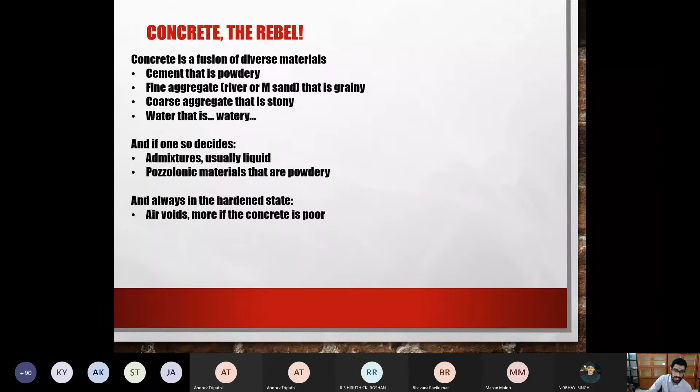Okay, so these are the components, and whenever your concrete hardens, you have some air voids, and if the air voids are too much, you have a poor quality of concrete. So you have everything. You have solids, liquids, and if you have air voids, you also have gases.

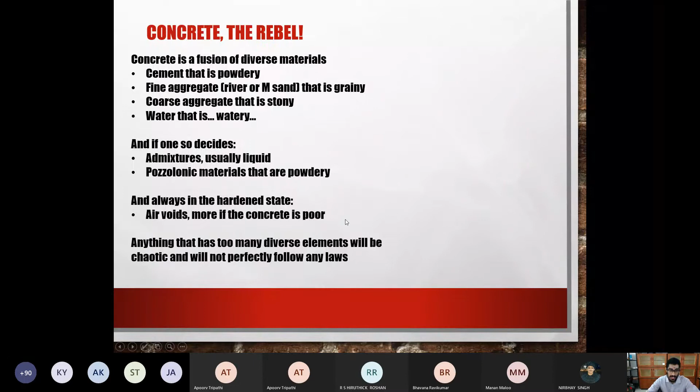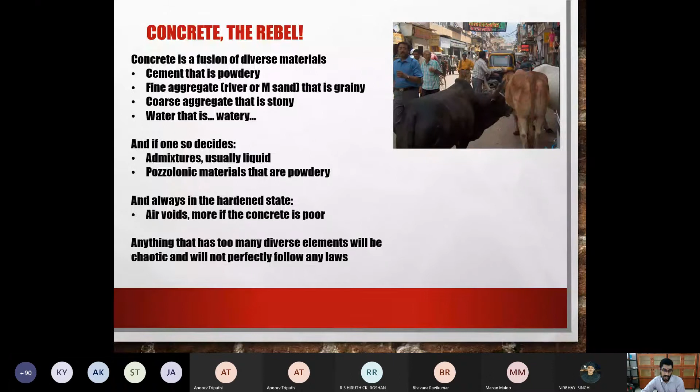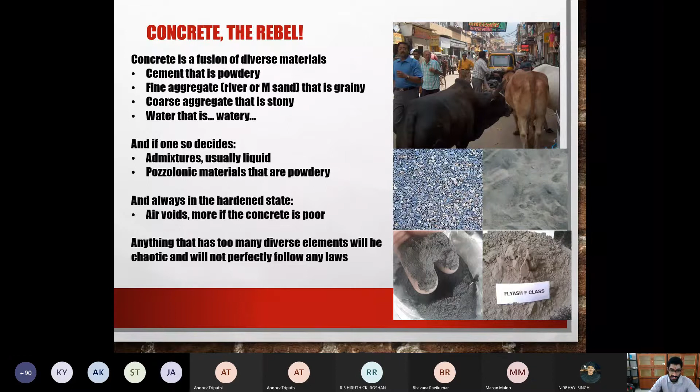Okay, anything that has too much diversity will be chaotic and will not follow any laws, just like our country. Okay, so whenever you have chaos, whenever you have too many diverse elements, you cannot expect any order. And similarly with concrete, it's not as predictable as some other metal, say like steel or aluminum or any metallic structural material. Concrete will not be as obedient as those materials.

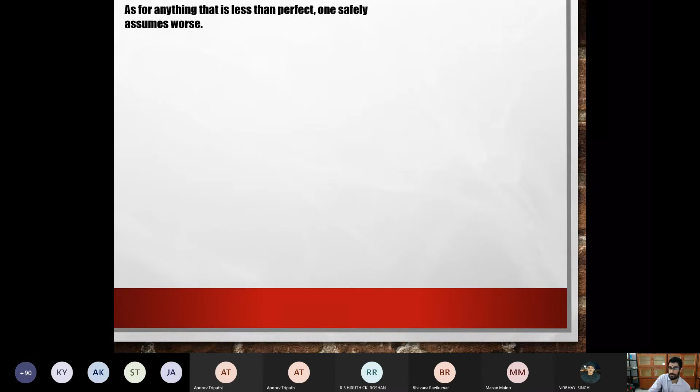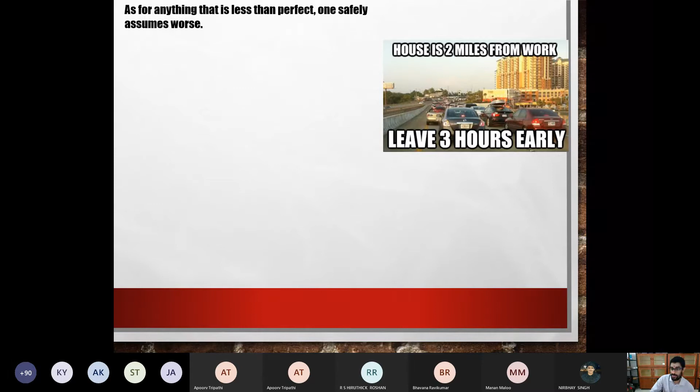Okay, so one thing is that whenever there is something which is less predictable, the thing that one person will do is they will assume what the worst case could be. So for example, if you have unpredictable traffic, you try to leave early. Depending on what your preference is, if you prefer being at home, you try to leave early from work. If you prefer being at work, you try to leave early from home.

And how early do you leave? It depends on the level of uncertainty in it. And this uncertainty can usually be measured by something known as standard deviation. So what is standard deviation? Mathematically, how do you describe standard deviation? Simple statistics. How do you find standard deviation generally?

How the distribution is spread. It can be a measure of how the distribution is spread. You said what? Sir, a measure of how much the distribution is spread. Okay, on either side of the mean. Yes. So that is standard deviation.

And in general, for concrete, because it is composed of several materials, you may not exactly have the same. If you talk about concrete technology, which you have done: if you want to find compressive strength of concrete, how many cubes do you test? 3. You test 3 cubes, and depending on how much quality was controlled when making those cubes, you may have very close ranges, or you may have a little bit wider range of compressive strength within those 3 cubes.

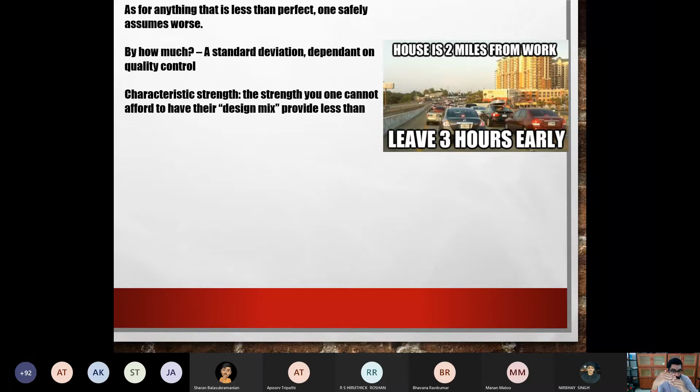It is not defined as the strength of concrete. It is defined as some strength below which the strength of concrete should not fall. So you're setting a limit and saying that the concrete strength should be above this limit. That is known as characteristic strength. For example, M25 means everything should come above 25, say 25.5, 26, 25.7. It will be something above 25. So that is known as characteristic strength.

If you take your code book, I will come to your code book soon. If you take your code book for concrete, it says the strength below which not more than 5% of the specimen results are expected to fall. That is known as characteristic strength. Okay.

So then you have something known as mean target strength. For example, you have done your mix design in your concrete technology, right? Yes, sir. Have you done it? Yes. So you know what mean target strength is, right? I don't need to explain more on this, right?

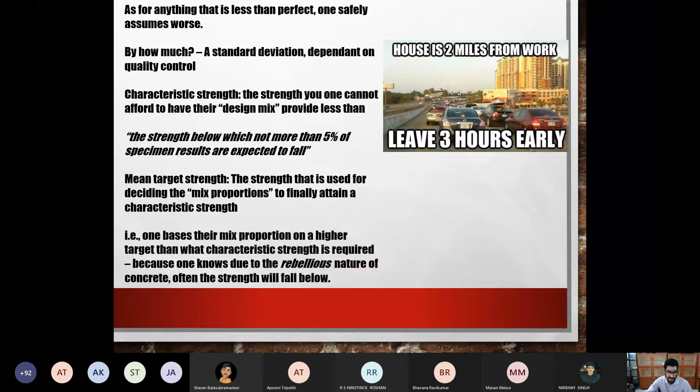Yes or no? I think you people would be familiar with this, because you've already done mix design in concrete technology. So I'm not explaining much further what is meant by mean target strength. So basically, the procedure is, if you want to get a certain strength of concrete, you will actually design your concrete for a greater strength. For example, one will make the mix proportion for a higher target than the characteristic strength you require. Why do you do it?

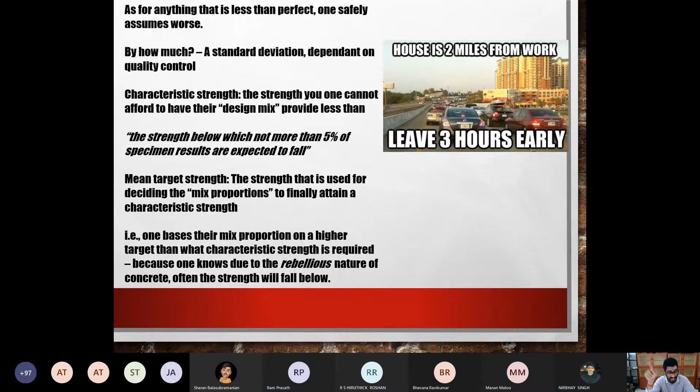Do you remember the formula for getting the design strength of concrete? Do you remember the formula for that? There is something. FCK plus 1.64 sigma. Sigma is your standard deviation, and depending on your strength of concrete, you have different values for it. So this is a graphical representation of your characteristic strength.

So if you test a lot of cubes, and you want your characteristic strength to be 30, you may have to design your mix for 30 plus 1.64 times standard deviation, which will come somewhere over here. And characteristic strength means that less than 5% fall below 30. So this figure tells what is mean target strength, what is characteristic strength, and how much can fall below it. This is just a simple representation.

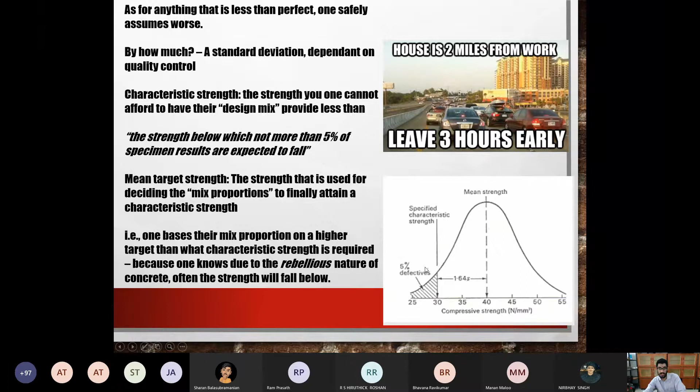Now the next thing is, in concrete technology, you have entirely dealt with the material aspects of it, just pure concrete, what pure concrete undergoes and how it behaves. When you talk about stress, anything given to you will take different types of stresses in different ways. So what are the different types of stresses that you know? Tensile, compressive, torsion, shear, and bending stresses, flexural stresses. So concrete will react to these stresses in different ways.

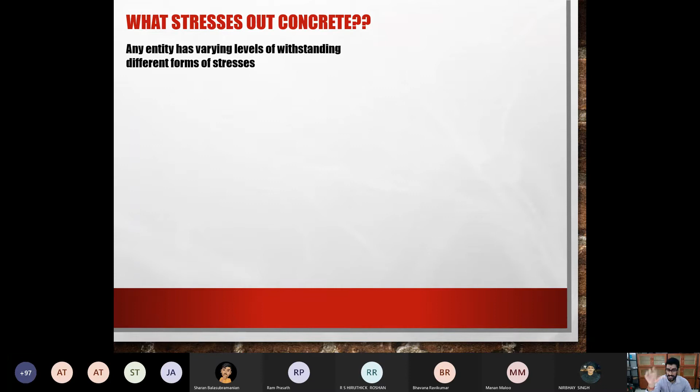For most items, like steel, it will behave the same way whether you test it in compression or in tension. Tension and compression are given a common name. Do you know what the name is? Axial stresses. So wherever you have axial stresses, metals will usually behave the same. When you come to concrete, even within axial stresses, the behavior in tension is different and in compression is different.

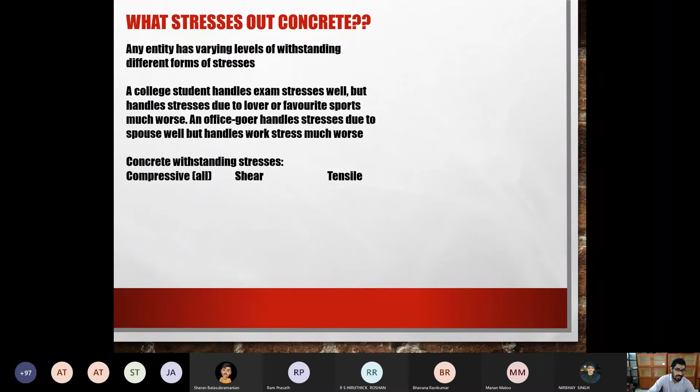Now this is just a colloquial example. A college student handles exam stresses well, but handles stresses due to his lover or his favorite sports team much worse. He will not care much about getting an E or a D, but if he has a breakup or if Barcelona loses, he will not sleep the entire night. And an office goer will be used to handling stresses from his spouse, but stresses at work will affect him more. So similarly, concrete handles different stresses differently.

For compressive stresses, it's good in resisting, and it's an excellent load-bearing material. For shear, not so good, because if you remember your mechanics of solids, whenever you have a pair of shear stresses, using your principal stress concept, you can always identify a principal tension direction and a principal compression direction. If you don't remember, please go back and recollect how shear stresses can be transformed to a principal compression and a principal tension direction.

So shear can be rethought in the form of a tension and compression pair. Because there's a tension part, it's not so good in shear. Pure tension, really bad. And bending stresses, you have read them in mechanics of solids, right? What are the two parts of bending stress? Based on the bending, one part of the beam will have compression and the other part will have tension. What is the location where it changes from compression to tension called? The neutral axis.

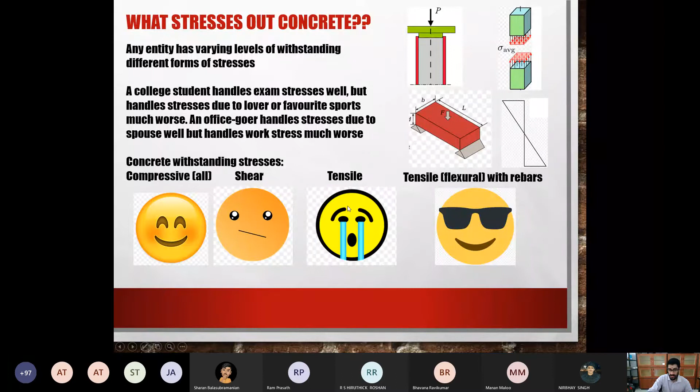So in general, if you have a beam like this, below the neutral axis will be tension and above will be compression. In a flexural member, above the neutral axis there's no issue, because it's compression and concrete is good in compression. Below the neutral axis, if you just leave it as concrete, it's going to be bad. If you give it rebars, then it will be able to handle the tensile stresses in beams as well.

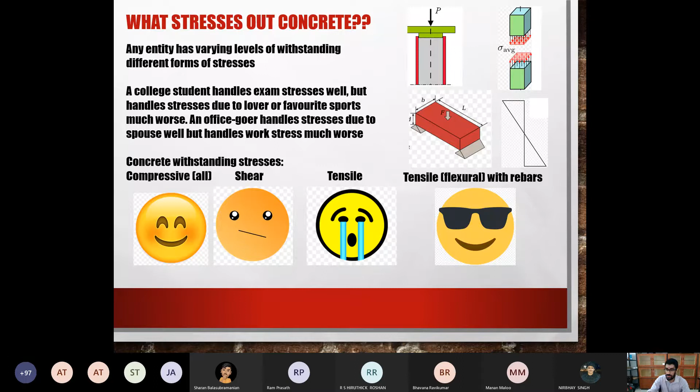So now this is basic RCC design. What do we mean by design? So this is the first thing. When you do design, you need to first identify the form and the purpose of the finally constructed structure. For example, if you are building a simple shed, just a shed, and you're building a column and you're giving the slab, for such a case you don't need to give a very thick or a big column. It's not going to take much load. It's just a covering roof.

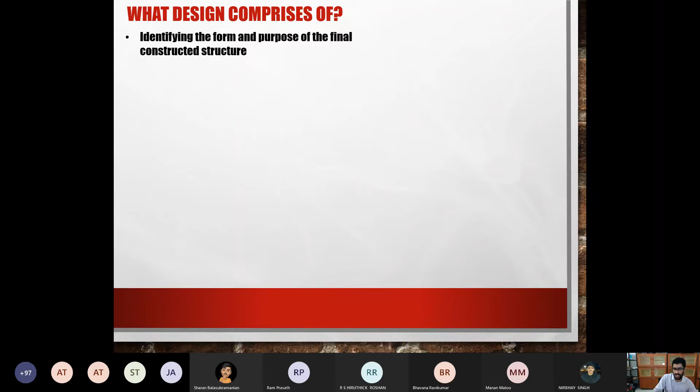Nothing is going to be coming on top of the roof except the weight of the roof itself. So for that you may even say that you don't want to use concrete. You may want to just give a wooden pole and keep a sheet over it. Depending on your money, depending on what purpose you're going to use it for, you have to decide what the form is going to be and what the use is going to be. Then after that, you will decide what material to use for it.

For example, if it's a truss, you may choose either steel or timber. If you are going to build the surface for a road bridge, there you will want to use concrete. You may not want to make a road deck out of wood or out of steel. If you make it steel, it will be strong, but it will vibrate a lot. Timber will not be strong enough. Concrete will ensure that neither of that is a problem. So first thing is identifying the structure and the form. The second thing is identify the material after you know what kind of a structure it's going to be.

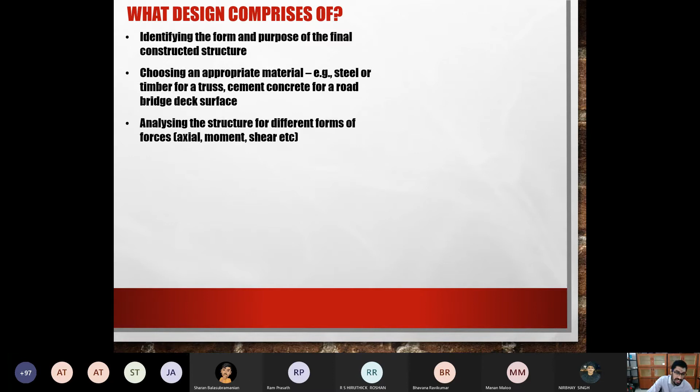And the next thing is you need to analyze. Once you decide the structure, you want to know what that structure experiences, what type of forces. Whether it's going to be subjected to axial forces, whether it's going to be subjected to moments, whether it's going to be subjected to large levels of shear or low levels of shear. You need to identify what is going to be faced by that structure. And then you need to know how that material behaves in each of these types of forces.

So we just saw in the previous slide concrete. Once you make it RCC, it's going to resist moments pretty well. As far as axial forces are concerned, it's pretty good in compression, pretty bad in tension. So depending on the types of forces, you may also try to know how to actually use that material to take that force. And to do this, you need to have a very good sound knowledge of mechanics.

Because if you want to know axial forces, for example, if you are building a truss, you need to know the axial force in each of the members of the truss. For that, you need to know how to analyze. You need to know method of joints or method of sections. Even if you're using a computer, you need to know how to use that computer program based on mechanics. Similarly, if you're getting a bridge girder, it's going to be subjected to bending moments. You need to know how to evaluate that bending moment, how to evaluate that shear force. Only when you are able to evaluate those will you be able to decide how that material is going to behave under those forces.

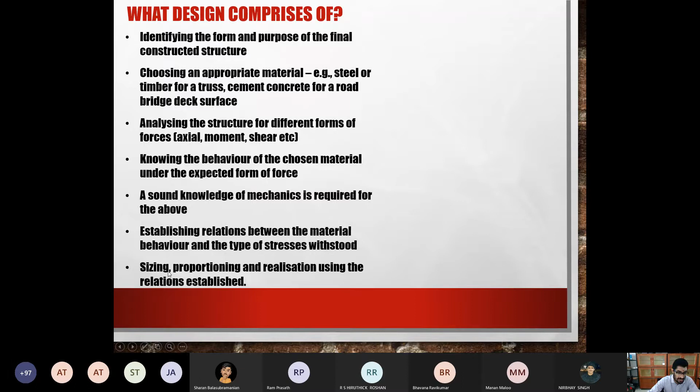And the final thing is you also need to know the relation between the material behavior and the types of stresses: how the material behaves and what types of stresses it can withstand. And the final step is, based on knowing the forces and how the material behaves for those forces, using the established principles you can decide what the sizes should be and what the proportions should be for the particular structural element.

So for example, you have a bridge, you have girders, you have a deck on top, and then you have girders running this way and girders running this way. Then these girders are standing on top of two piers or something like two columns.

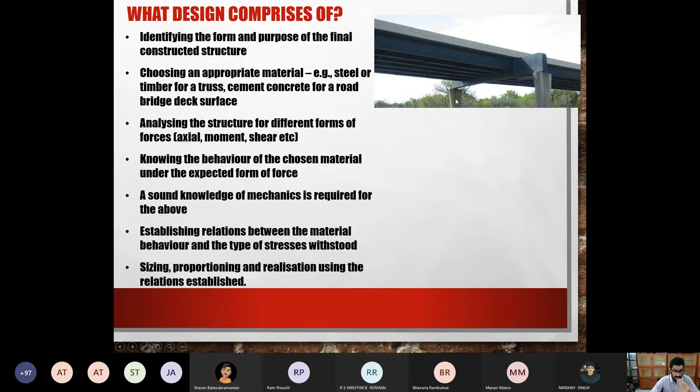Then from the girder to these piers, what are the bending moments in these piers? What are the axial forces in these piers? How to design them. Once you know this and the relations, you can decide whether you want to use an RCC beam or a steel beam. If it's a steel beam, you need to know how wide, how deep, how thick the flanges should be, etc. If it's an RCC beam, you decide the dimensions, the reinforcements, the hoop reinforcements, etc.

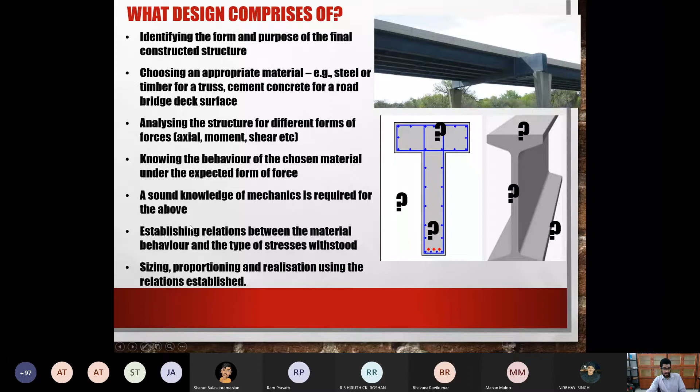Okay, so this is the process of design: identification, selection of material, analysis of the structure, behavior realization of the structure, establishing the relations, then deciding the sizes, proportions, and reinforcement, etc. So this is the process of design.

Now coming to concrete as a material under different states of stress. This is how concrete behaves under uniaxial compression, meaning your common compressive strength test. You know how to do a uniaxial compression test in concrete. If you want to find the compressive strength of concrete, what type of specimens would you use? What shape? Cubical or cylindrical.

So what sizes are they? If it's a cube, what size? If it's a cylinder, what size? 15 by 15 by 15, and 15 centimeters diameter and 30 centimeters height of cylinder. Yeah, either that or you can also use 10 dia and 20 centimeter height. Basically, the ratio of height to diameter should be 2. That's the main thing.

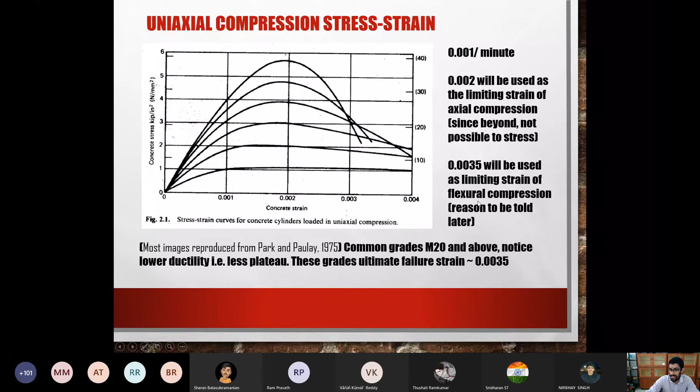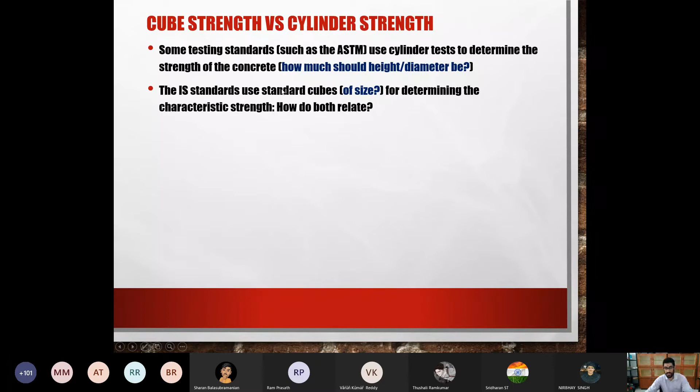Now, cube strength versus cylindrical strength. Some testing standards, like ASTM. What is ASTM? American Society for Testing and Materials, I suppose. It uses cylinder tests to determine the strength of concrete. You told me the height by diameter should be 2. The Indian standard uses standard cubes; the size is 15 cm cube for determining the characteristic strength. Of course, there should be a relation between both of them.

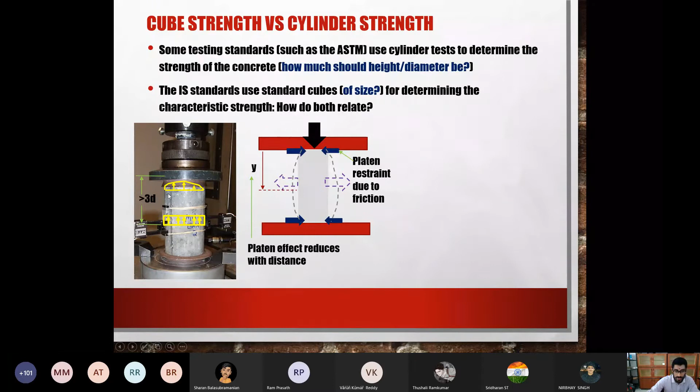One thing is, when you test a cylinder like this, this is height, this is diameter, the ratio is 2. The top surface of your cylinder is where the load is applied. If you look at the stresses at this top surface, you will find that at the circumference you will have very low stress. As you go near the center of the cylinder, you will have highest stress.

But if you go into the cylinder for a distance greater than 3 times the diameter... Of course, we are not going to reach 3 times diameter, only 2 times diameter in your cylinder size. Only if the distance between the loading point and the location is greater than 3 times the diameter will you have a uniform stress distribution. But our cylinders are of ratio 2, not 3. Therefore, even at the center of the cylinder, you will not have uniform stress distribution. It will be a little bit non-uniform. So that is one thing.

The other thing: when you press it, the cylinder will try to expand in its middle. However, at the top, you have the plate on top and the plate on bottom. At that location, because there's friction between the plate and the surface of the cylinder, it cannot expand that much, because the friction force will oppose this expansion. That is known as the platen effect.

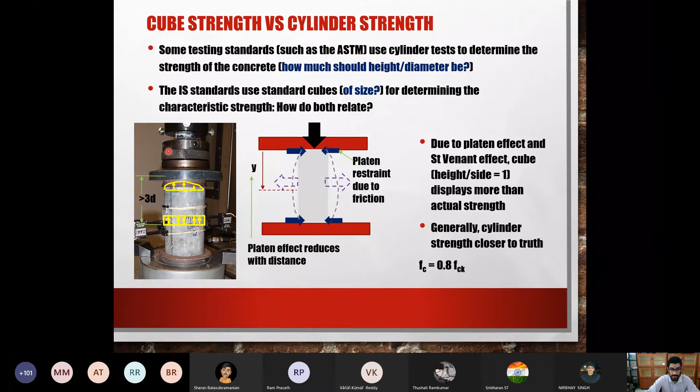I'll give you two situations. One is you are testing in the lab - you're probably doing this test in a lab. Another situation, you're building a big structure and you're keeping some strain sensors on it, measuring the strain for the whole year. So which curve will you get if you test in the lab? Which curve will you get if you test the building?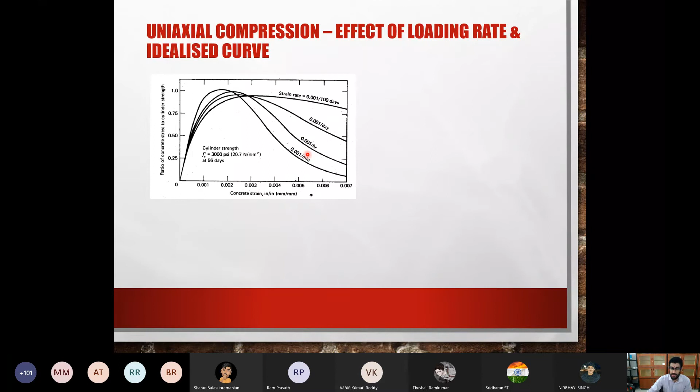You have some curves over here. Which strain curve corresponds to lab test? Which strain curve corresponds to actually putting sensors in a building and measuring it over time? The topmost curve for the building. And for the lab, the bottom one maybe - yeah, mostly the bottommost curve. Sometimes they'll use the second curve, but only for specific tests. Most common is the bottommost curve. So that's why I meant normal service condition means in actual application, like in a building.

So in a normal service condition, like in a building, it will correspond to low strain rates like this - you get the gradual yielding curve. After this 50% of strength, at least till this point, you can have almost a straight line. Beyond 50%, it starts to become a bit parabolic. So this portion of the curve should be idealized by a curve as described in the equation given by this. Until this point it can be taken as almost linear; beyond this part it becomes a bit parabolic. So you need an equation for that.

This is the commonly known equation for that, given as FC equals FC double dash. EC is the current point strain, epsilon C. Epsilon naught is that 0.002 you see over here. And this is FC double dash, which is the top peak strength of concrete, the ultimate strength of concrete. Based on that, we'll be able to model this parabola.

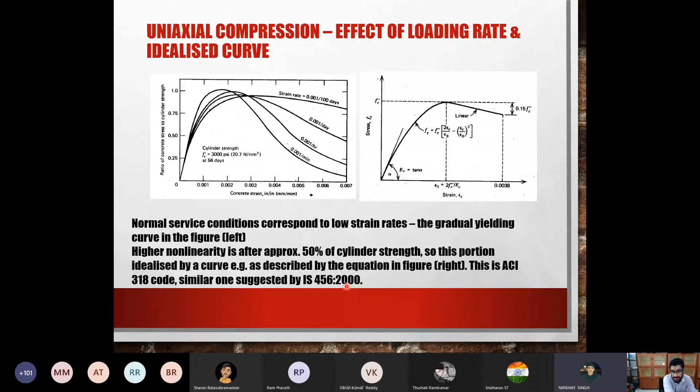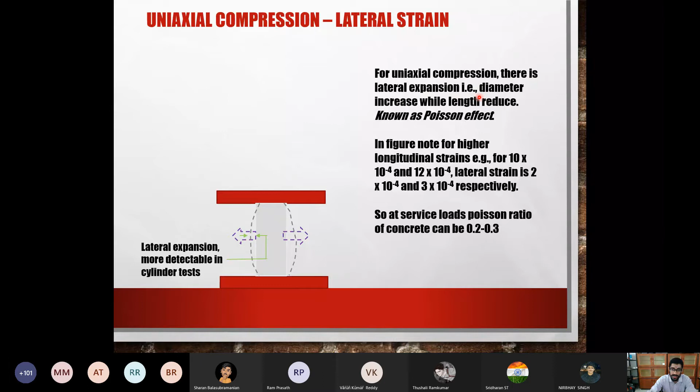One is direct axial strain. You also can have lateral strain, meaning when you have expansion this way, it becomes lateral strain. This is more detectable in cylinder tests where the diameter will expand a bit. For uniaxial compression, there is lateral expansion - for example in a cylinder, you will have an increase in diameter while you compress it. This is known as the Poisson effect.

So then you have this figure. Longitudinal means axial, along the length. Lateral or transverse both mean the same. So that is this strain curve. Note that for higher longitudinal strains, for example 10 into 10 power minus 4 and 12 into 10 power minus 4, lateral strain is about only 2 and 3. So that is the ratio of transverse strain to longitudinal strain.

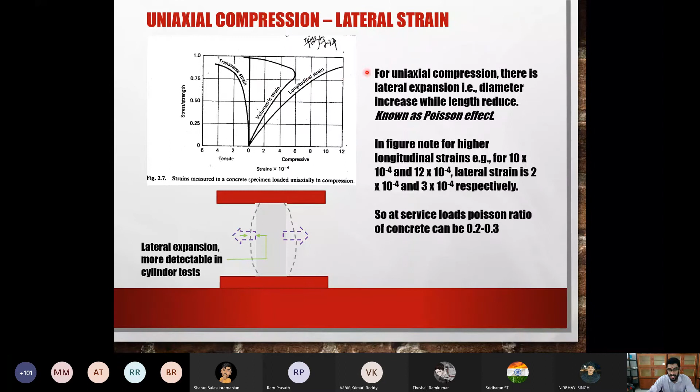So what is the other name for ratio of lateral strain by longitudinal strain? It's known as Poisson's ratio. So you can just take this ratio. You see that the Poisson ratio of concrete can be taken about 0.2 to 0.3. Simply know this: you take about 10 divided by 2 divided by 10, or 3 divided by 10, like that.

So these are the different tests and the different code books. For cylindrical strength you can use IS 516, similarly for cube strength as well. I hope you've heard of this code book in concrete technology, IS 516 — this is the code book which tells you how to do these tests. So you can just have a look at this code book, it's freely available on the internet. So your task for today is to go to the internet, search for IS 516 and go through what they say for these two tests. You've already learned this test, but just open the code book and see that there is a code book for these things.

If you want to find the modulus and Poisson's ratio, IS 516 does not specify a test — you may have to use the ASTM standard. For split cylinder strength, IS 5816 is used. Split cylinder strength test and the 3-point bending test, both given by IS 516 — these two tests are used to find the tensile strength of concrete.

Now why do you think we are not doing it the way we find compression strength — taking a cylinder and compressing it to find the compressive strength? Similarly, if you want to find the tensile strength of a steel rod, what test do you do, and what machine do you use? I'm not sure if you'd be aware since you've all done online lab, but anyway I'm still asking. So why don't we do the same thing for concrete to find the tensile strength? Can you do it?

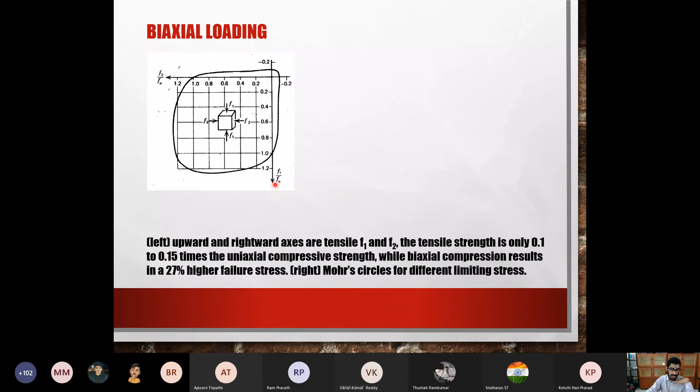This quadrant marks the envelope of stresses when both F1 and F2 are compressive. When both F1 and F2 are compressive, you see that your concrete can actually reach a strength greater than the uniaxial compressive strength. Fu is your uniaxial compressive strength—meaning this test you did, say for M25, you got 25 MPa as strength. If you actually do a biaxial compression like this, the strength you get will not be 25, it will be 25 times 1.2.

This seems a bit strange. So just loading in one direction gives some strength value. Now you're adding additional load in another direction, but the strength, instead of reducing, is increasing. Why?

Sir, the loading is contributing to the strength, sir. Actually, the concrete specimen will have a failure in one direction—like in the lateral direction, it will have a failure. If we restrain it from the lateral direction, then the strength will increase automatically.

It may get amplified, sir. Sir, when we are compressing the specimen in the uniaxial direction, the concrete specimen may get a failure in the lateral direction. So when we are restraining the concrete specimen in the lateral direction, in biaxial loading, we can increase the strength.

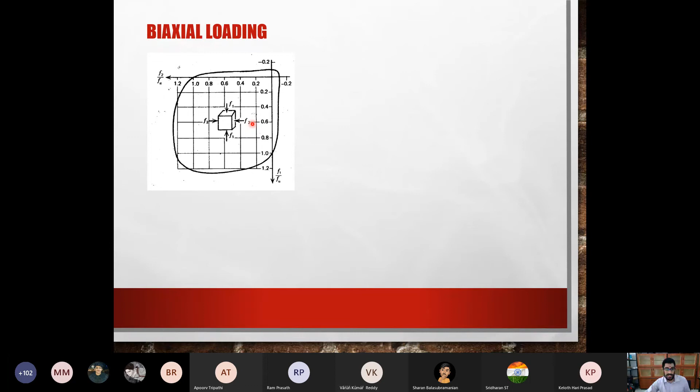However, if one of those directions is tensile, then it becomes really bad—you get less than 20% of the strength you get by a uniaxial test. For example, if F2 becomes tensile, the side is already expanding, and if you pull it further, it's going to fail much faster. That is what is happening.

So, what is this picture? You see some circles—what circles are they? Mohr circles? Mohr? What do Mohr circles tell you? Geometrical interpretation between the shear stress and normal stress.

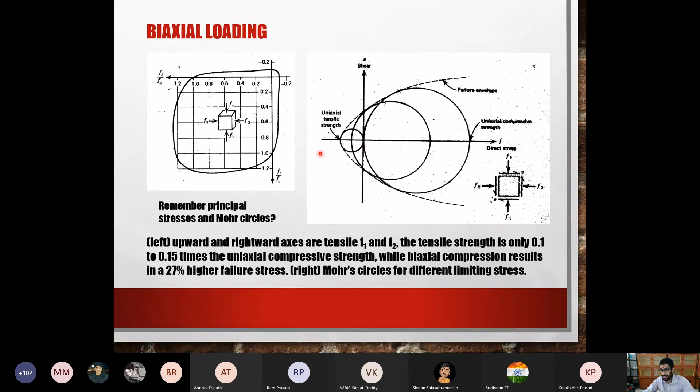Okay, so that's what this is telling you too. If you have uniaxial compressive strength, look at the size of the circle—it's quite large, meaning your failure envelope is quite big. When you have a very general state of stress, it's going to be a normal circle, and if you have uniaxial tensile strength, it becomes like this. So this is just to tell you how these stresses are related. Probably, how much more time do I have?

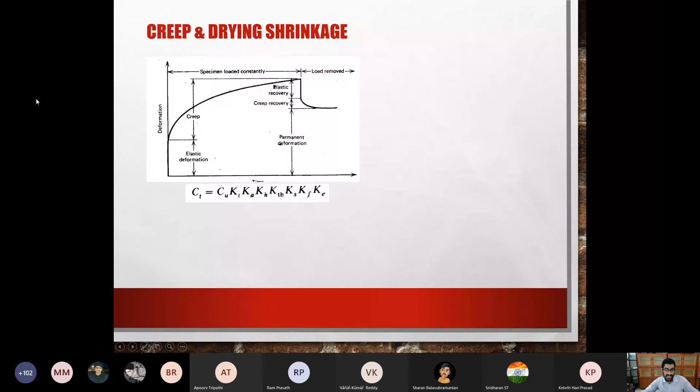Okay, I think you can finish it off.

So you know what is creep and shrinkage, right? Creep and shrinkage you have heard already previously in concrete technology. Okay, so I don't need to explain much of it. Basically, creep is a strain which takes place over a long time under constant load. So that is known as creep.

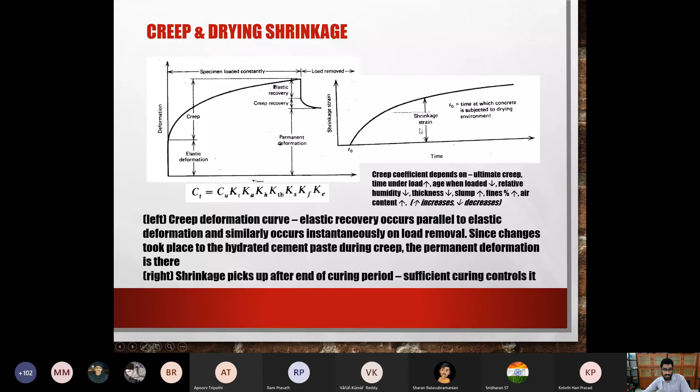It depends on several things like all these things: time under the load, age when it's loaded, relative humidity, thickness, slump, percentage of the fines, air content. It depends on all these things. And shrinkage happens because of your water cement ratio, and in order to control it, you do sufficient curing.

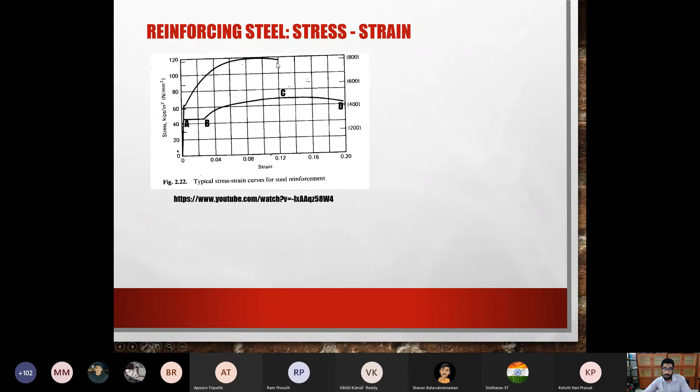And the final part of reinforced concrete is your steel bars. Okay, and this is the stress strain curve; this is mild steel, this is high strength steel. So just like your concrete, when you have low strength, the strain and ductility will be quite large. When strength is more, your ductility or strain will be much lesser. So this is typical also for steel.

This is mild bars. The top one is HYSD, cold twisted bars. This is the one which is more commonly used for reinforcement. The plain bars are used mainly for purposes like tying your reinforcement and other things. You'll know what is tying later when you start doing beam design.

So point A is known as your yield stress. You know that. This region AB is known as your yield plateau. C is the ultimate stress; it's the highest point of your stress. D, where the steel rod breaks, is known as your breaking stress, and from C to D, where the stress is slightly reducing, is known as the softening range.

So for high strength yield deformed bars, you may not have a sharp yield point. So you use something known as a proof stress, which is obtained by drawing a line at 0.002 strain and making it touch the curve. Have you heard of proof stress before in your mechanics of solids?

Okay, this is what is proof stress. Sometimes your stress strain curve will not have a sharp yield point. This is especially true if you have high strength steel bars. So in that case, you want to know how to find the yield strength. Here, this is a very sharp point; this is yield stress. If the curve is like this, you won't know what is the yield stress.

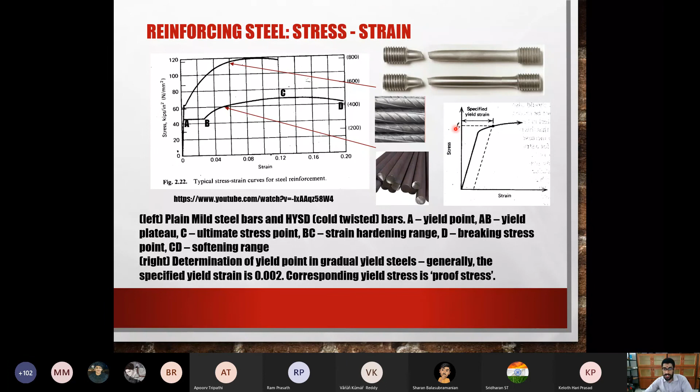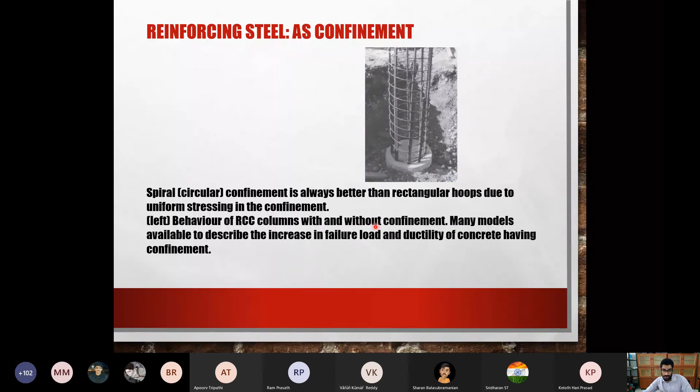This is just a broken rebar. So it can be used as reinforcement. It can be used as confinement as well. You see several bars over here in the column. They are main bars. These circular hoops are known as confinement. And usually the RCC columns, you can just see over here.

Because once again, assume you have a plain cylinder; it will expand. If you give it confinement in the form of circular hoops: it's very easy to expand concrete when you press it. When you give it a steel hoop inside, that hoop has to expand, and making that hoop expand is not as easy as making the concrete expand. So it will take a lot of stress and prevent this expansion from happening. That is known as confinement.

The lateral expansion causes the steel hoops to experience hoop tension. Have you heard of hoop stresses, in your mechanics of solids? Have you heard of what is hoop stress? Cylinders. You heard it, right?

So it will develop a hoop stress, because steel is strong in tension, it will not fracture easily. It will not actually expand easily either. So thereby the hoops will confine the concrete, meaning that they will keep the concrete inside without allowing the concrete to expand.